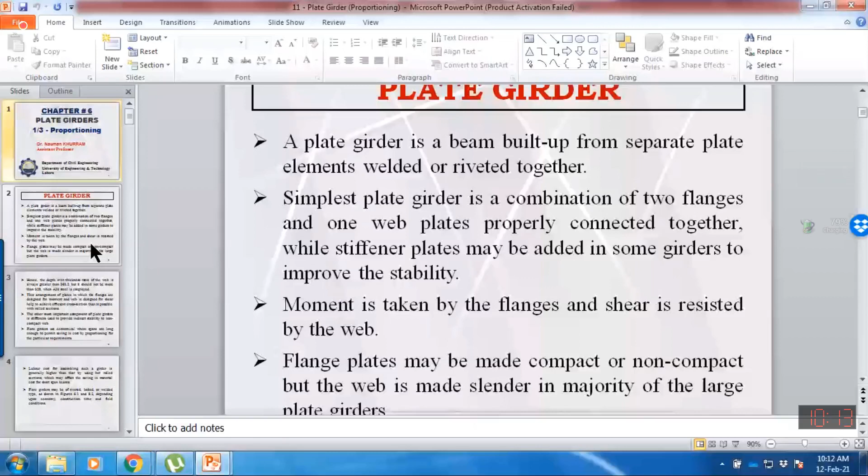So what we need to do is check the capacity of the web only, without any stiffener. If the shear capacity of the web is more than the applied force - for example, in example 6.1, when we designed the plate girder, we plotted the shear force and bending moment diagram. This was the bending moment diagram, and the maximum shear force acting in the plate girder for this loading is 1519. So we check the web: if shear capacity is more than 1519 in this case, then we do not need any stiffener.

But if the capacity of the plate girder web is less than the applied shear, it means we need to strengthen the web. How can we strengthen the web or improve shear capacity? We need to provide stiffeners, or subdivide the web panel into different segments. So in stiffener design, we are going to decide the spacing of the stiffener, number one, and the thickness of the stiffener, because the length of the stiffener is already known - it is provided between the flanges, so whatever is the height of the web, that is the length of the stiffener.

So when we are designing the stiffener, what does it mean? We decide the spacing of the stiffener and the thickness of the stiffener in such a way that the shear capacity of the web panel may be more than the applied shear force. So here, first I will give you an overview of stiffeners, what types are there, and what the design criteria are.

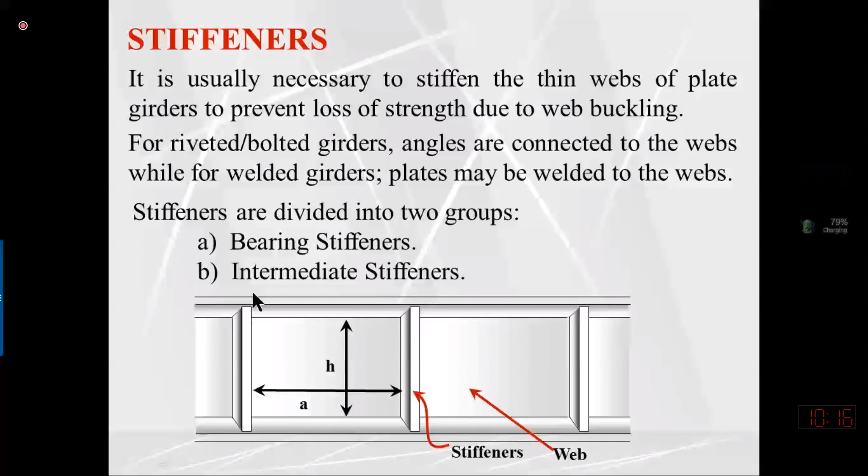What are bearing stiffeners? From the word bearing, it means they are bearing or resisting the load. Bearing stiffeners are normally provided wherever a concentrated or very heavy force is acting on the plate girder. What are the types of concentrated force? Support reaction and any heavy or concentrated load acting on the plate girder. So we always provide bearing stiffener at supports and wherever a point load is acting, because when a concentrated or very heavy point load acts, maybe on any side of the flange, due to stress concentration it may cause web crushing or web crippling.

So to safely transfer the force from the top or bottom flange to the web, we need to increase the area of the web by providing the bearing stiffener. These transfer heavy reaction or concentrated load to the full depth of the web, providing uniform shear transfer, changing the stress from local to uniform distribution, so there will be no crushing or web buckling. Bearing stiffeners are always provided in pairs, meaning they are provided on both sides of the web.

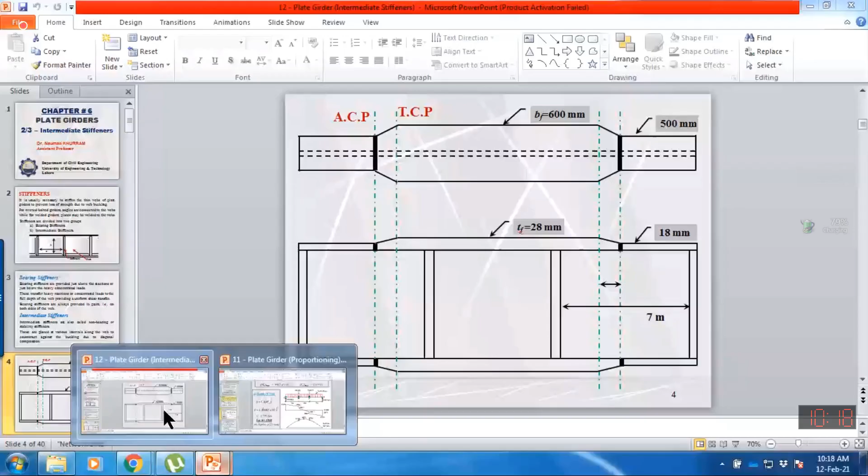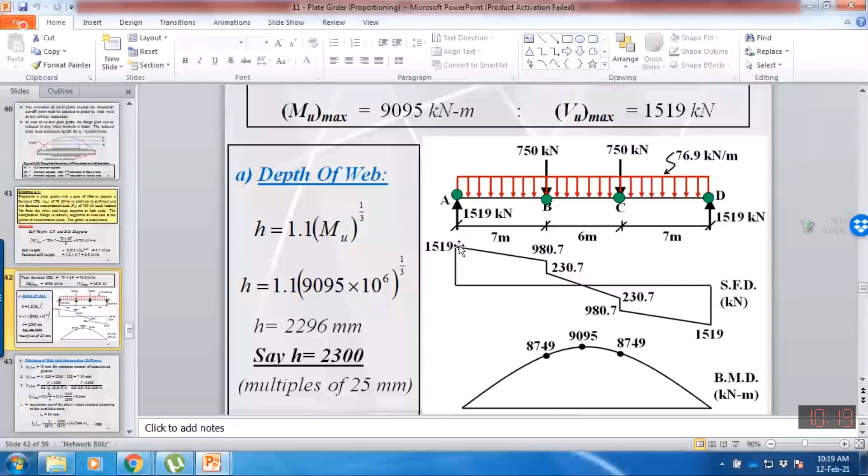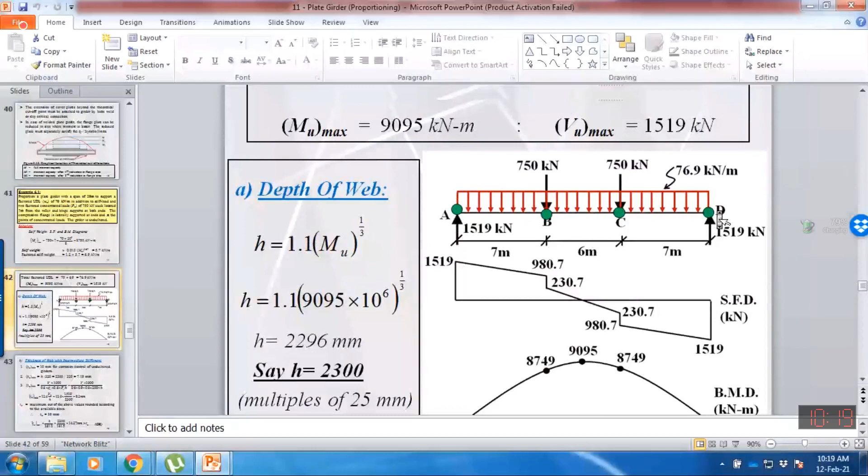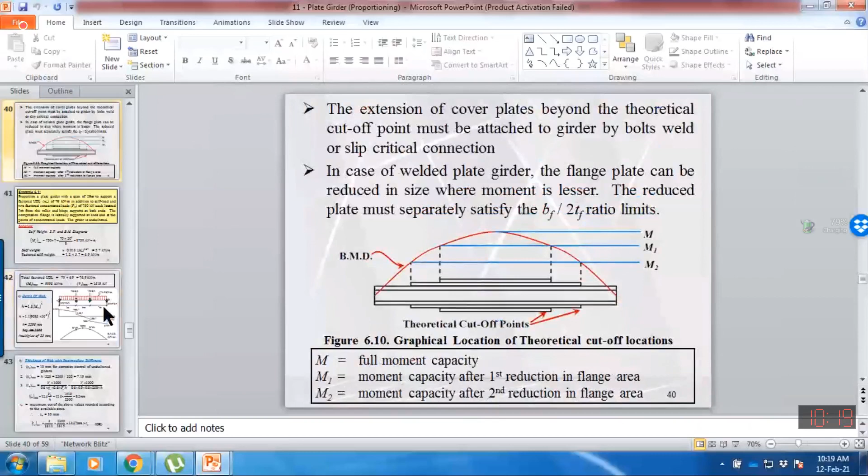So it means that from the top, at points B and C, there are chances that the web may cripple or local crushing may occur due to a heavy force. Similarly, due to a heavy support reaction acting at the bottom flange, the web may crush, cripple, or buckle. So we need to provide bearing stiffener at points A, B, C, and D because these points are subjected to concentrated force. This means the location of the bearing stiffener is already known, wherever the support reactions or heavy loads are being transferred to the web.

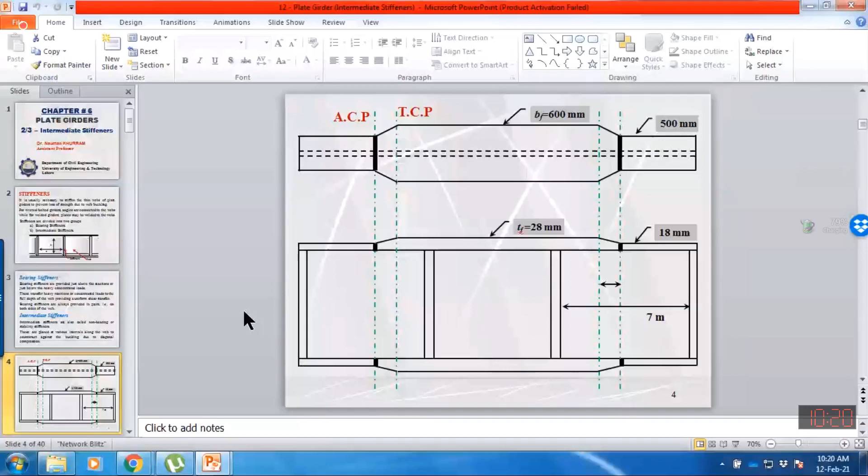Last time when we designed this plate girder, we already knew the location of the bearing stiffener. Bearing stiffeners are provided at the ends and underneath concentrated loads. Then, in between panels, if the shear capacity of the panel between bearing stiffeners is less than the applied shear, we also need to provide intermediate stiffener to enhance the shear capacity of the web. So bearing stiffener serves both as an intermediate stiffener and as a bearing stiffener, increasing the shear strength of the web and also resisting the applied or concentrated force by providing column action, because the bearing stiffener between the flanges may behave as a column. We shall discuss this in detail in our next topic.

And what are intermediate stiffeners?

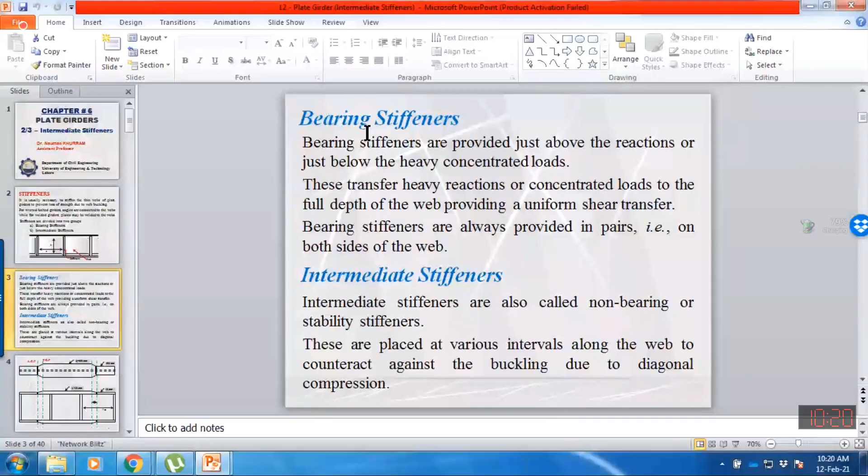Intermediate stiffener are also called non-bearing or stability stiffener. These stiffener are not resisting any applied load. Rather, they are stabilizing the web, or they are improving the shear capacity of the web. These are placed at various intervals along the web to counteract buckling due to diagonal compression. I will explain this phenomena. But at the moment, you must understand intermediate stiffener are provided to enhance the shear capacity of web or to stabilize the web.

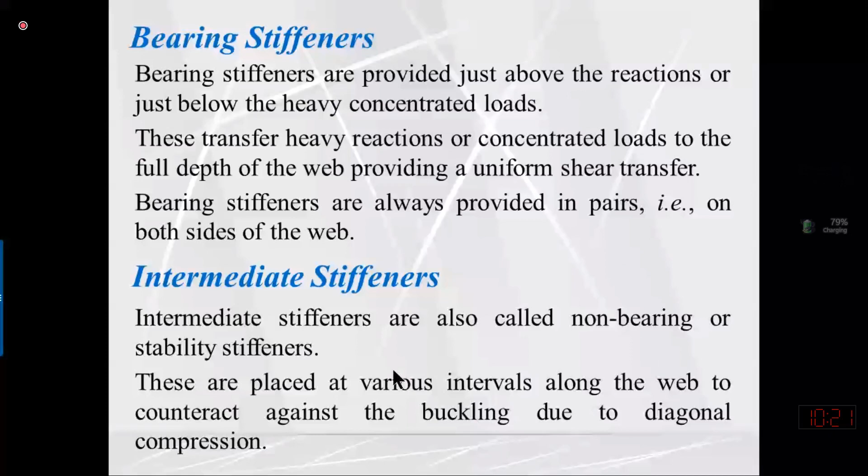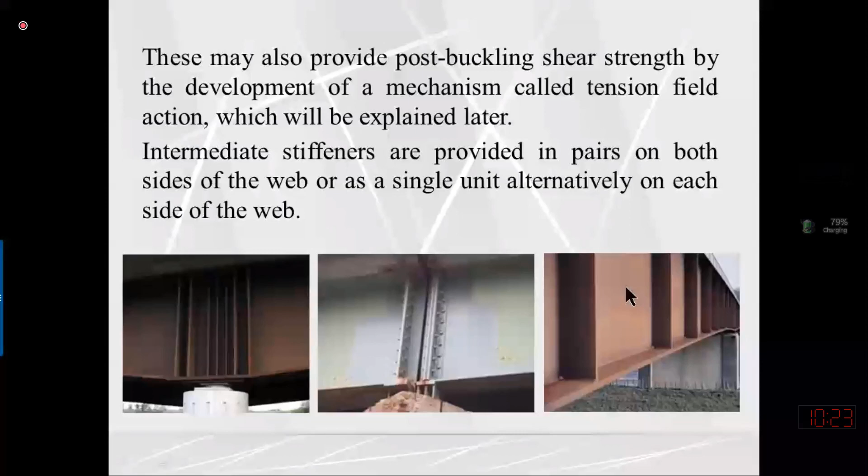Actually, we know that when the web is slender, meaning the slenderness ratio of the web is more than the lambda r value of web, it means that our web will never fail due to yielding of the web. So the web will never fail due to shear yielding. Rather, the web will buckle at a value much less than tau y or much less than fy.

So what we are doing is using a parameter called CV value, which is the web buckling coefficient. This web buckling coefficient is the parameter which converts the yield stress to the critical stress or buckling stress. So CV value is the ratio between critical buckling strength over yielding strength. Tau critical for a slender web will always be much less than tau y. So what is that value? If we multiply tau critical... tau y with CV, we may have tau critical. Similarly, that will also be equal to critical buckling strength, shear force, or the capacity, shear buckling strength over yielding shear strength, because tau critical multiplied by area of the web is equal to VCR.

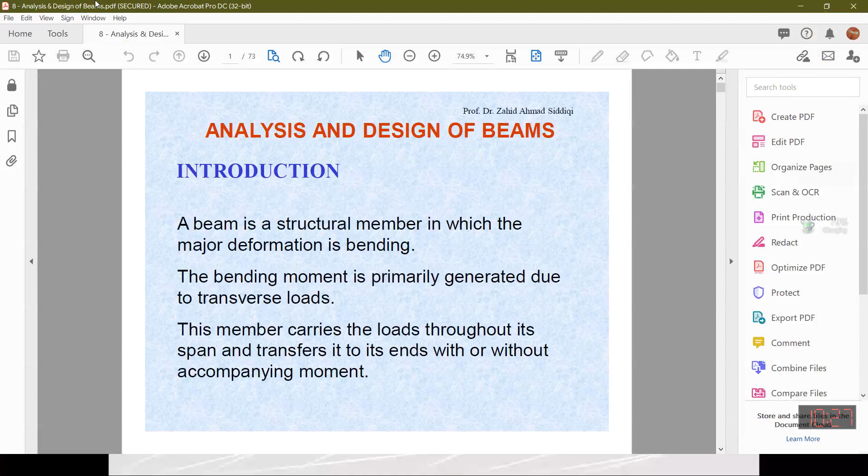But if we are providing the stiffeners, then we have some extra strength available, which can be determined by CV prime. So CV prime is the shear enhancement factor. In other words, this is not the exact definition, but CV prime is the strength or shear strength improvement in shear strength due to stiffeners. The increase in shear strength by the provision of stiffener is computed by CV prime value.

So the total strength will be equal to, because this parameter is constant, tau y is equal to 60% of Fy, because shear strength of steel is indirectly determined by multiplying tensile strength with 0.6, and area of the web is height of the web into thickness of the web.

So this CV is the factor which is used to determine the buckling strength of web alone without stiffeners. And CV prime is the factor which lets us know the improvement of shear strength by providing intermediate stiffeners, or increase in shear strength of web due to provision of intermediate stiffeners, and how we are having extra strength available due to the stiffeners we shall discuss in today's lecture.

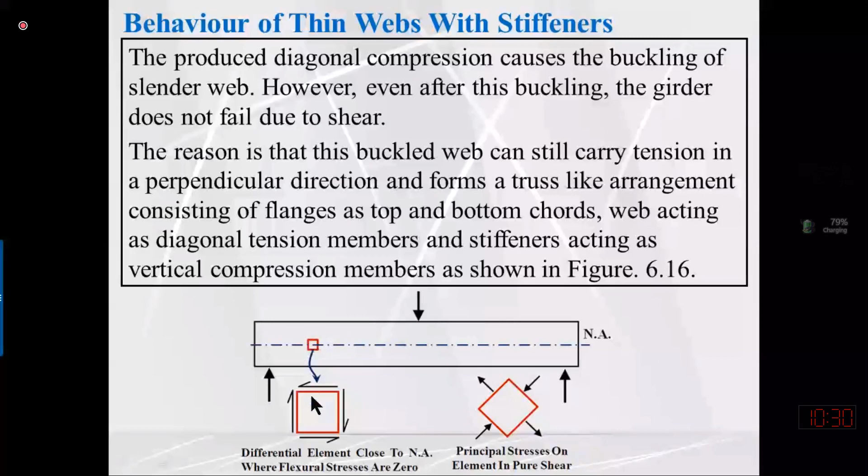So I would like to explain step by step. I'm taking this small element from the web, and this element's bottom is along the neutral axis. Just to explain this, let me separate out these forces first, so that you will be able to understand. What I have done, I have taken a very small element along the neutral axis, and you can say that the height of this element may be dy and the thickness may be equal to dx, differential, very small.

And at the bottom of this element, okay, from this side, this is also continuous, this side is also continuous, this side is also continuous, because we have cut this material. So at the bottom, we can determine the horizontal shear stresses which are acting, by this formula.

Tau x is equal to VQ over Ib, or VA prime into y bar, that's supposed to be the partial area above the layer and moment arm of that partial area above the neutral axis. So anyhow, we are able to determine it.

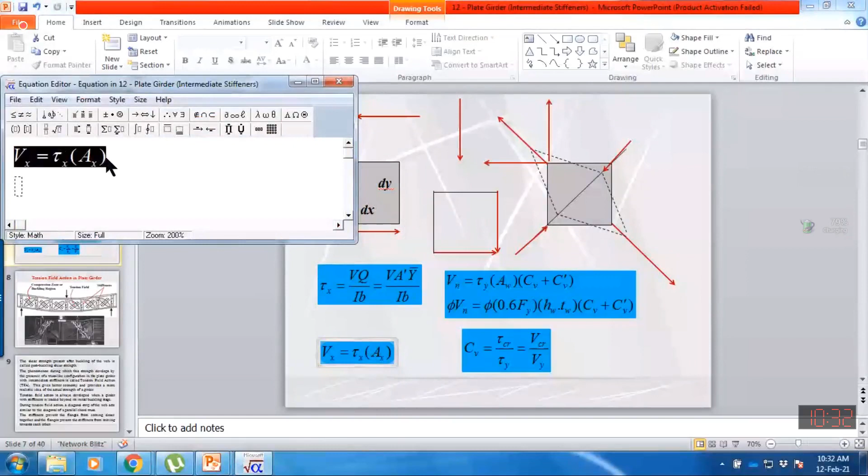So you can convert this shear stress into shear force if you multiply this shear stress by the area; this area will be equal to dx, and you can consider that the out-of-plane dimension is 1. So you can say that this is equal to dx into 1.

So you have this force as a Vx force. So what do you think? Because on this element, we must have some reaction over here, some reaction here, and also a reaction here to balance this free body diagram for the element, because these are continuous material, because we have cut it. So what do you think, is this element balanced? No.

Just to balance this force, which is acting in this direction, if we apply summation Fx equal to 0, we must have a balancing force acting on the top side. And what do you think, is this element still balanced? Yes, summation Fx is equal to 0, but rotational equilibrium is not balanced. For example, if I take the moment about this corner equal to 0, this force is passing through this corner, so its moment will be 0.

This force tends to produce a moment on the counterclockwise side, meaning rotational equilibrium is not balanced. These two forces are perfectly equal in magnitude and act in opposite directions, so they are called a couple.

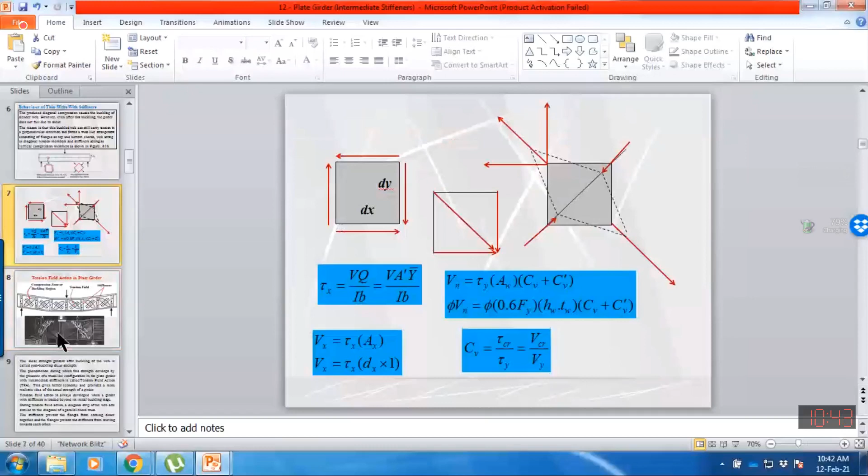The horizontal component is balanced by the normal forces in the flange plane, and the vertical component acting upward is balanced or resisted by providing intermediate stiffeners, which will have compressive force. So the intermediate stiffeners resist the vertical component of this diagonal force developing in the web, and the flanges balance the horizontal component of the tensile force developing in the web. In this case, we have extra shear strength available.

So the phenomena in which this tensile force develops in the plate girder is referred to as tension field action. The mechanism by which the tensile force developed in the web after buckling is balanced by the intermediate stiffeners and the flange is referred to as tension field action.

At the moment I have explained the behavior. Now we will read the definition of tension field action. This is very important, and sometimes I ask this question in quiz. This tension field action, or improvement of shear capacity due to development of these tensile forces, will only develop if we are providing intermediate stiffeners.

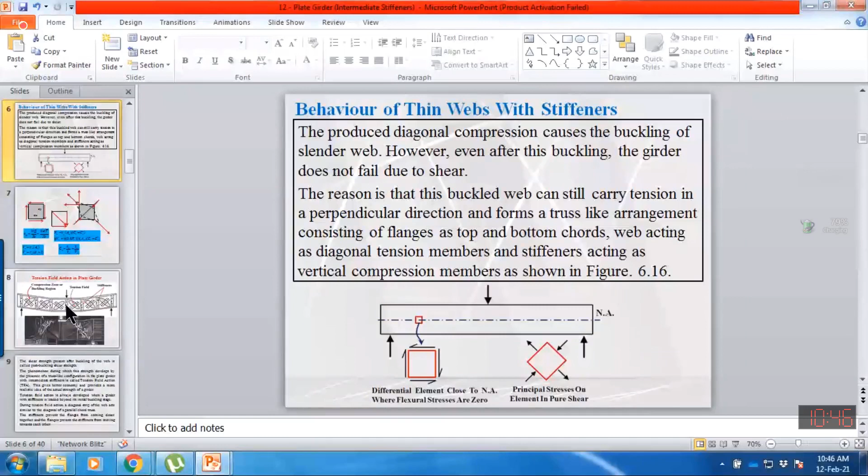Sometimes we also ask the question, what is the truss analogy in plate girder? If we are providing the intermediate stiffener in our plate girder, then after buckling, when the web approaches its buckling strength, tensile forces develop in the diagonal direction. To balance these tensile forces, the top flange and bottom flange behave as top chord and bottom chord of truss, and the intermediate stiffener serves as vertical member of truss, and the diagonal strip of the plate girder behaves as a diagonal truss member. Thus the shear capacity is increased by tension field action, or truss analogy.

So what is the truss analogy or tension field action? After the web buckling, the top and bottom flange behave as top and bottom chord of the truss member, the stiffener behaves as a vertical member, and the diagonal strip serves as a diagonal member.

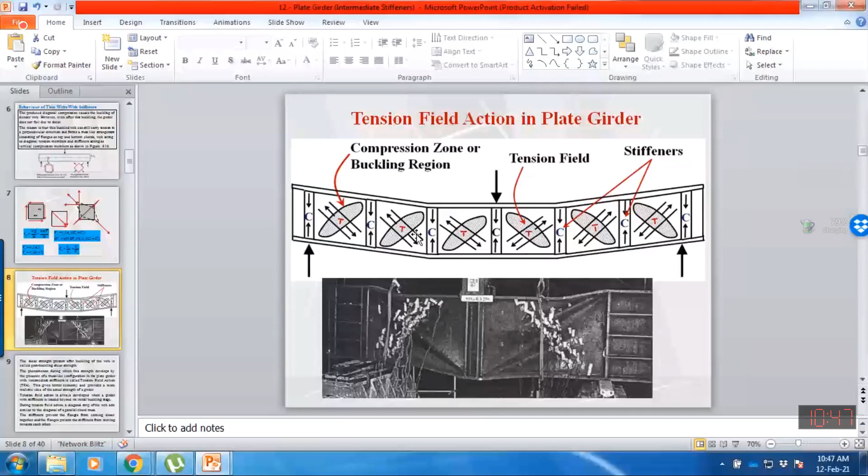So shear strength present after buckling, let me bold this, shear strength present after buckling is also referred to as post-buckling strength. This strength will only be available after buckling. When the web will not buckle, tension field action will not develop.

After buckling of the web, this is called post-buckling strength. The phenomena during which this strength is developed by the presence of a truss-like configuration in plate girder with intermediate stiffener is called tension field action.

So I have already explained this gives better economy and provides a more realistic idea of the actual strength of the girder. It means that if we have extra strength available, instead of increasing the thickness of the web, we can consider that fraction of the strength which is contributed by tension field action.

Tension field action is always developed when a girder with stiffener is loaded beyond the initial buckling stage. This is very important to learn.

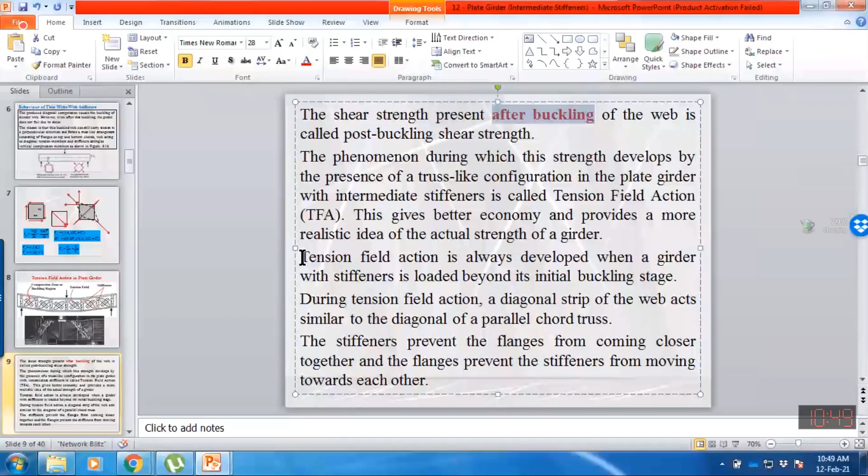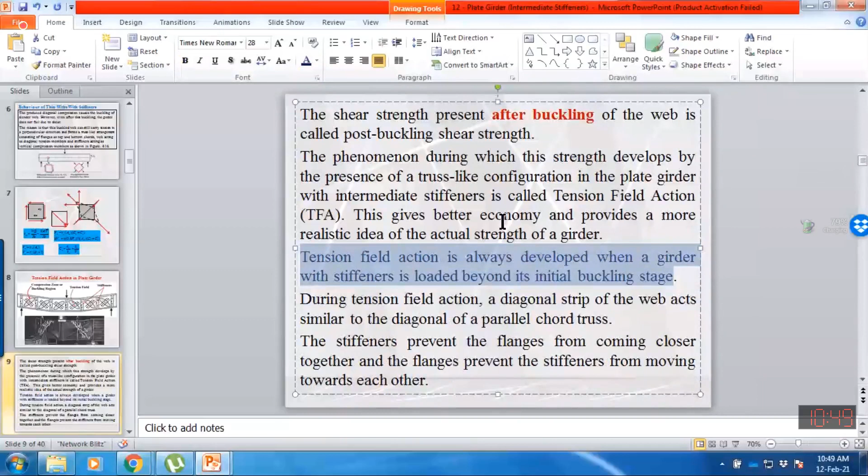So tension field action will only develop in two cases. Number one, if we are providing intermediate stiffener, and number two, if the web is loaded beyond its buckling value. If the web is not subjected to its buckling value, tension field action will not develop, because it only develops when the web buckles. And when the web buckles, perpendicular to the buckling direction, tensile forces will develop.

Thus, during tension field action, a diagonal strip of web behaves or acts like a diagonal member of the parallel chord truss. The stiffener prevents flanges from coming closer to each other, and the flange prevents the stiffener from moving toward each other. So what does it mean?

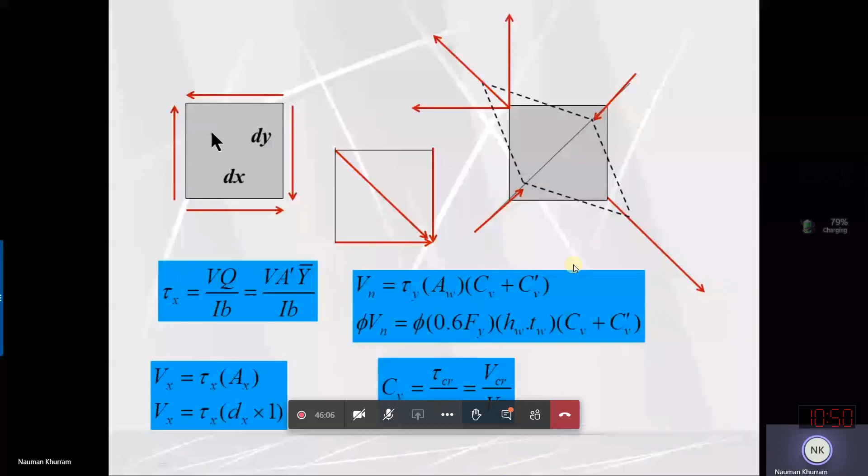The flanges will not let the web thickness, web height, and stiffness reduce. They will also resist the shortening, the reduction of dimension, or the change of shape of this web panel. So if we are not providing intermediate stiffener, then the buckling or deformed shape of the web will be likely to occur.

Intermediate stiffeners, which before initial buckling were assumed to resist no load, will resist compression load after web buckling and will serve as a compression vertical of truss. So what does it mean? It is very important to understand.

Intermediate stiffeners will only become active once the web buckles. So before the web buckling, no compressive forces develop in intermediate stiffener. They become active only once the web buckles, and when the web buckles, tensile forces develop in the web panel, which must be resisted by the intermediate stiffener and flanges.

With tension field action, a web may resist shear equal to 2 or 3 times that present at initial buckling. So what does it mean? It means tension field action contributes shear capacity almost 2 to 3 times more than web buckling strength alone.

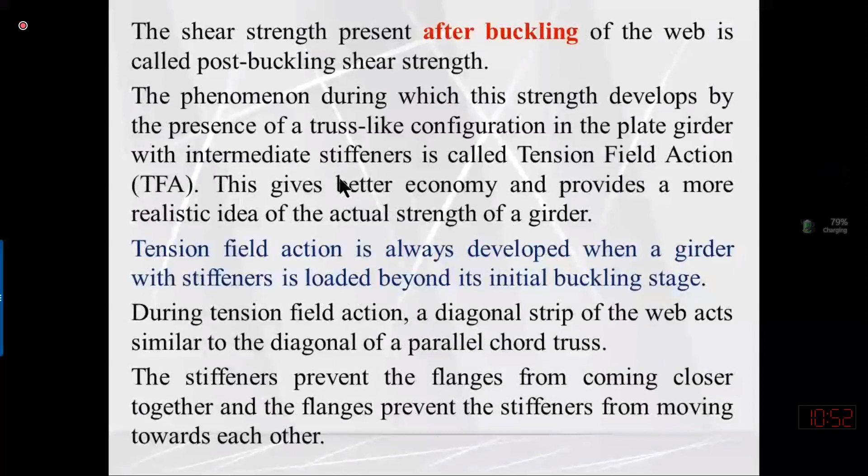So what does it mean? If let's suppose this is constant, this CV value is the fraction of the strength available due to web buckling alone.

CV prime is the strength enhancement due to the presence of intermediate stiffeners. CV is the coefficient that tells us the shear strength of the web alone, the buckling strength of web alone. CV prime is the factor that tells us the contribution of tension field action. So when we are solving the example, you will see that the CV prime value will be almost 2 to 3 times more than the CV value.

If CV value is 0.2, then CV prime value will be maybe 0.6. Or let's suppose if CV value is 2, then CV prime value will be maybe 6. So we can have an idea, and when we are solving the numericals, I will repeat it again.

So the estimated ultimate shear that a panel of the web between adjacent stiffeners can withstand is equal to the shear strength, or buckling strength, of the web alone plus the shear strength contributed by tension field action. The amount of tension field action depends upon the proportioning of the panel.

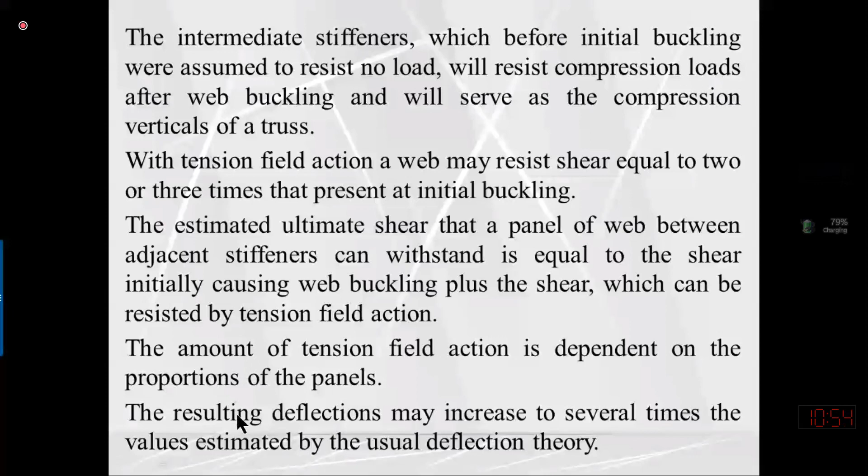So when we are achieving or improving the shear capacity by tension field action, this is because tension field action will only be available once the web buckles, meaning it undergoes large lateral deflection.

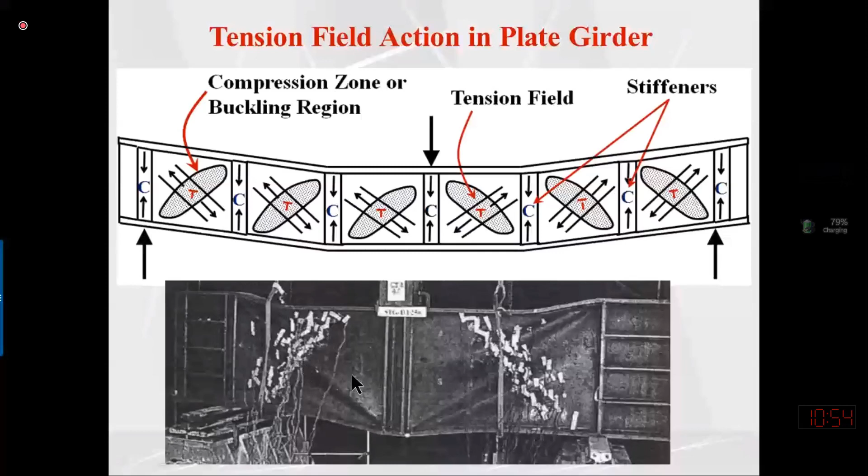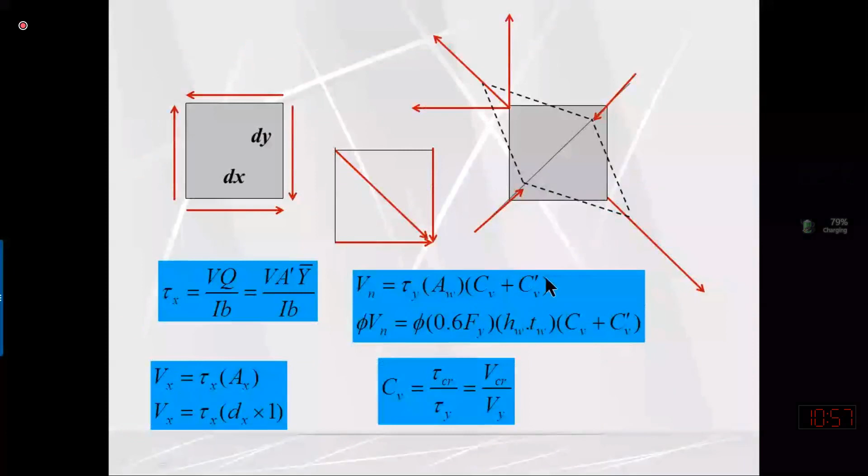So we will study their proper definition. CV is called the shear coefficient without tension field action and stiffeners - it is the shear coefficient or shear strength parameter, the shear strength provided by the web alone, called shear coefficient without tension field action and stiffeners.

So it is the ratio of critical web stress to shear yield stress of web material. CV is the ratio between critical web buckling shear strength over yielding shear strength. In other words, the CV value is used to convert the yield strength to the buckling strength. So the CV value will always be less than 1.

So this is the parameter that lets us know at what percentage of the shear yielding the web is buckling - the fraction of shear strength available due to the web alone, or buckling strength of web alone. This parameter is used to determine the buckling strength of the web alone with respect to the shear yield strength of the web - as compared to the shear yield strength of the web, how much percentage or fraction of web buckling strength is available.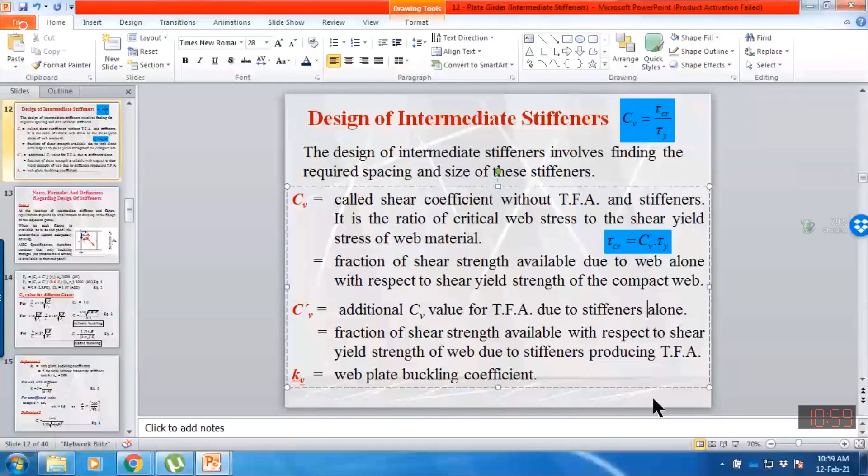Fraction of shear strength available with respect to shear yield strength of web due to stiffener producing tension field action. How much extra strength as compared to the yield strength is available due to tension field action.

Kv is the web buckling coefficient. Next question is how we can determine Cv and Cv prime value.

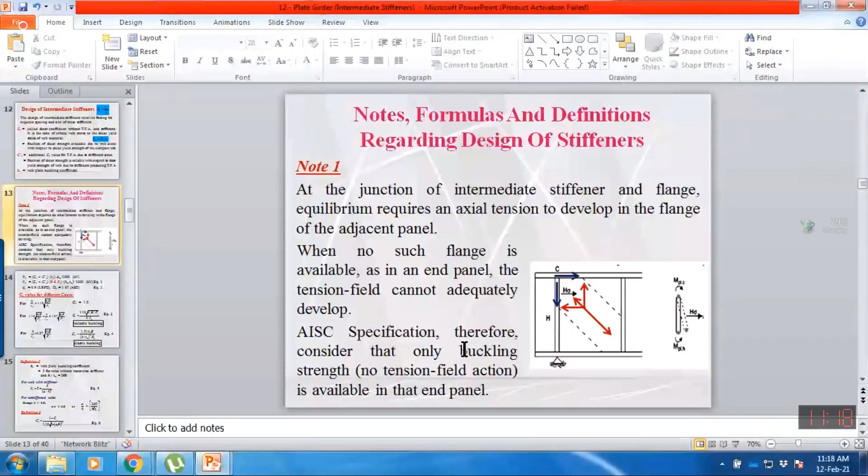As we discussed previously, when the web will buckle and we are providing intermediate stiffener, a bearing stiffener will also serve as intermediate stiffener. When a web panel is buckling due to compressive forces developing in this direction, after buckling, the tensile force will develop along this diagonal direction.

We can consider a web strip of uniform thickness which is subjected to tensile forces. These tensile forces can be balanced: the horizontal component of the tensile force developing in this strip is balanced by the resistance offered by the flange, and the vertical component of this tensile force is balanced by the compressive forces developed in the intermediate stiffener.

After that, when the stresses in this stiffener or in this flange due to these resisting forces become more than the yielding of material, failure will occur. If these stresses are less than yield stress, it means they will be capable of resisting or balancing these tensile forces, so they are enhancing or improving shear strength, as we have already discussed.

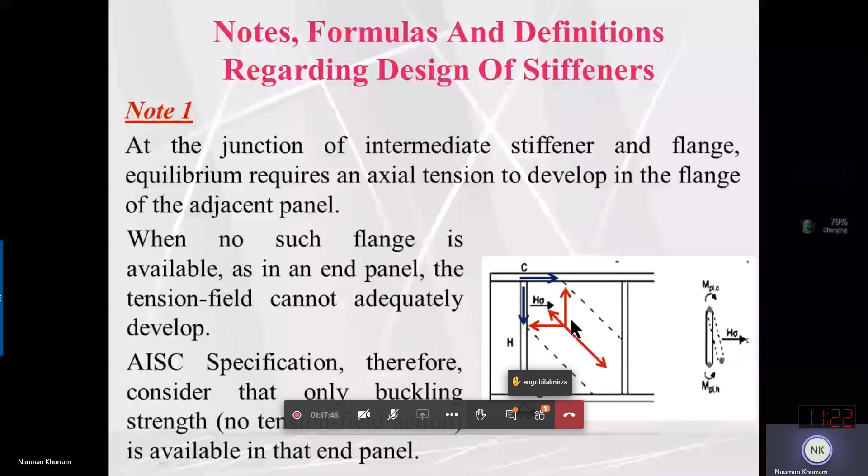How do we compute the total shear capacity? Total shear capacity is computed as a fraction of the strength contributed by web buckling alone plus a fraction of the strength contributed by tension field action, which can be determined by computing Cv and Cv prime values respectively. So if we are given the design of plate girder, meaning we know the flange size, web size, spacing of stiffener, and size of stiffener, we can determine the total shear resistance or shear capacity of web with and without tension field action.

So how can we compute the Cv value? Cv value is based upon three conditions, just like I told you that our plate girder may be compact depending upon flange compactness, depending upon lateral torsional buckling, and similarly based upon web local buckling.

So you can see we are having three different formulas, just to give you the analogy, we are having three different expressions to compute CV value. For example, if our web is compact, the height of the web over thickness of the web ratio is less than this parameter, 1.1 under root kV into E over Fy. So you can consider this is the lambda p value for the web of plate girder.

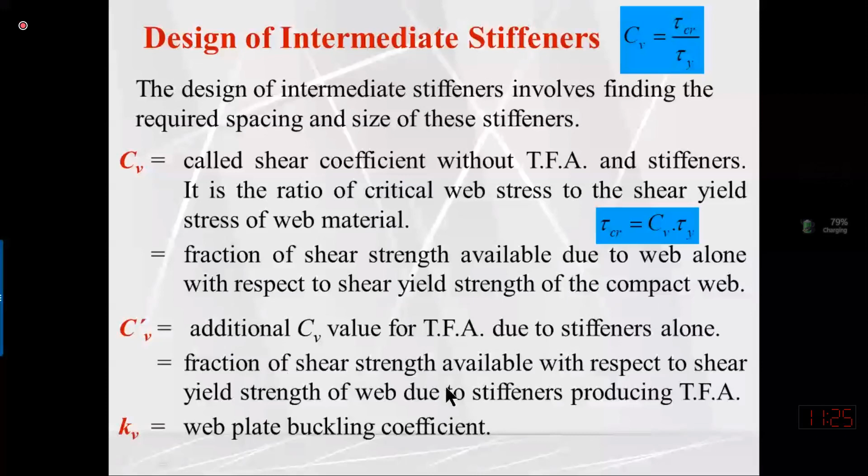So KV value is the web plate buckling coefficient, which is depending upon the panel size or the aspect ratio of web. So this KV value will be equal to 5 when we are not providing intermediate stiffeners. If we are not providing transverse or intermediate stiffeners, then KV value will be equal to 5. Or if height of the web over thickness of the web ratio is also less than 260, in both cases KV value is equal to 5.

But when we are providing the stiffeners, then we need to compute KV value by this expression: 5 plus 5 divided by A over H ratio squared. This means that KV value is the function of spacing of stiffener and height of the web.

Lesser will be the spacing, more will be the KV value. Because if A will be larger, we will have this larger component, so 5 divided by a larger value will have the lesser answer. So KV value is the function of spacing of stiffener. A is the spacing of stiffener.

In other words, we can say that KV value, if it is a function of spacing of stiffener, then H over TW ratio needs to be compared with this parameter, which is also the function of KV value. So depending upon this condition and elastic buckling of the slender web, we are having two different CV formulas, because CV value is also directly proportional to the KV value. So what we can say is that CV value, to a certain extent, is also the function of spacing of stiffener.

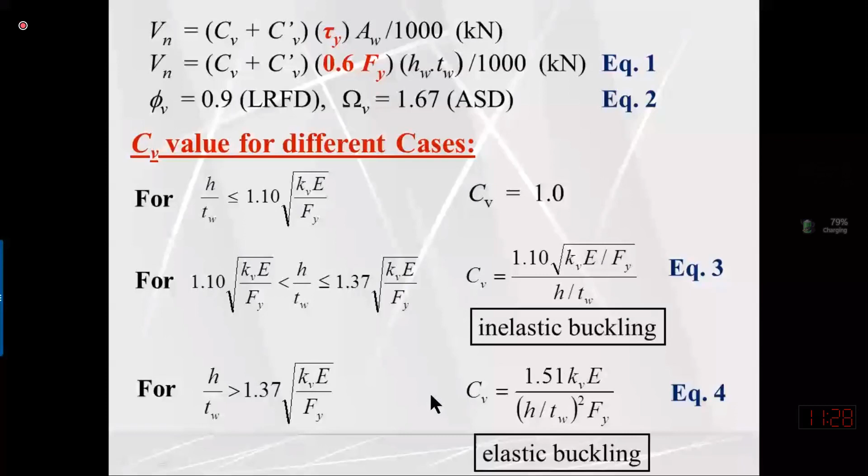Because KV value is 5 if we are not providing intermediate stiffeners, the minimum value of KV will be 5. KV value will be larger if we are providing intermediate stiffeners. So for unstiffened web, K value will be equal to 5, let me make it KV.

Sometimes we are providing the stiffener, but the spacing of the stiffener is very large. So if the spacing of stiffener is very large, tension field action will not develop. Tension field action will not develop if A over H ratio is more than 3. More than 3 means the spacing of stiffener is more than 3 times the height of the plate girder.

Or if A over H ratio is more than the square of 260 over H over TW ratio, we will satisfy this condition when designing the plate girder. And the formula for CV prime is this one, equation 6, and it is the function of CV value and A over H ratio. Again, CV prime is the fraction of the strength available due to tension field action.

So this formula CV prime is only applicable if A over H ratio is less than 3. First, if we are providing stiffener and spacing of stiffener is less than 3 times the height of the plate girder, and also A over H ratio is less than 260 over height of the web over thickness of the web ratio squared.

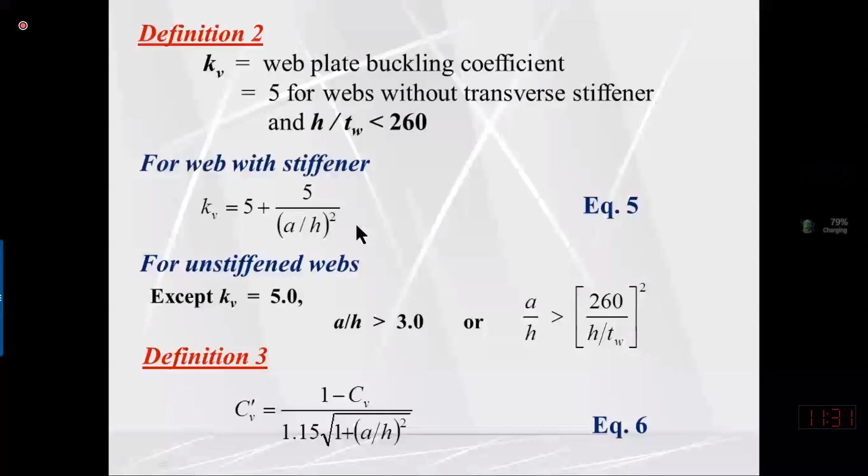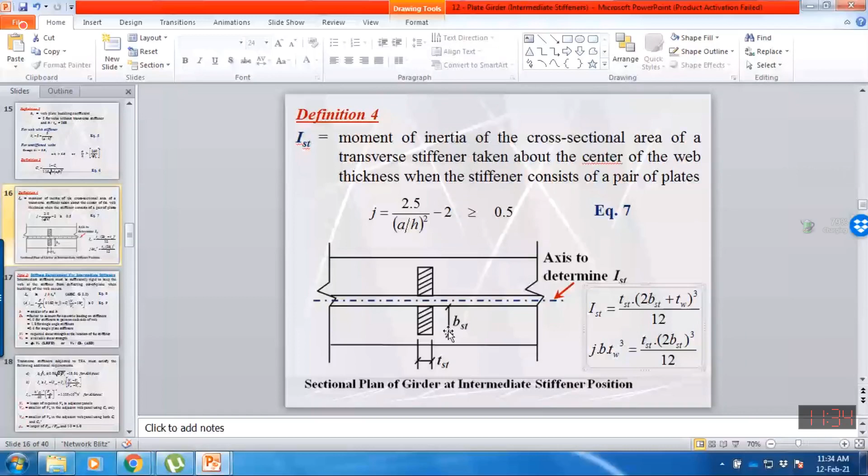So we can compute the moment of inertia about this center of web. Actually, this expression is equal to... if I'm taking the moment of inertia of these two stiffeners, if B is the width of one stiffener, and TST is the thickness of one stiffener, the total width of two stiffeners will be equal to BST plus thickness of web plus this BST.

So total depth of two stiffeners along with the thickness of the web will be equal to 2 times the BST plus thickness of web, and this thickness will be equal to TST. So moment of inertia will be equal to B into D cube divided by 12. The B value is the thickness and the depth is equal to 2 times the B value, one B value is 1B and thickness of web.

But for simplification, we ignore this thickness of web. For simple calculation, we ignore the thickness of the web, so we are having this simple formula. So this is the moment of inertia of intermediate stiffener

about center of web. So if you are using two stiffeners, using stiffener in pair, then you will have this expression. But if you are providing a single stiffener only on one side, then you need to deduct this two, because total thickness of the stiffener about this center will be B. And if you are computing the moment of inertia of one stiffener about its base, this formula will be 3, because you are supposed to compute the moment of inertia of a single stiffener about its base. The moment of inertia of a rectangle about centroid is B d cube divided by 12, and moment of inertia of stiffener about its base will be B d cube divided by 3.

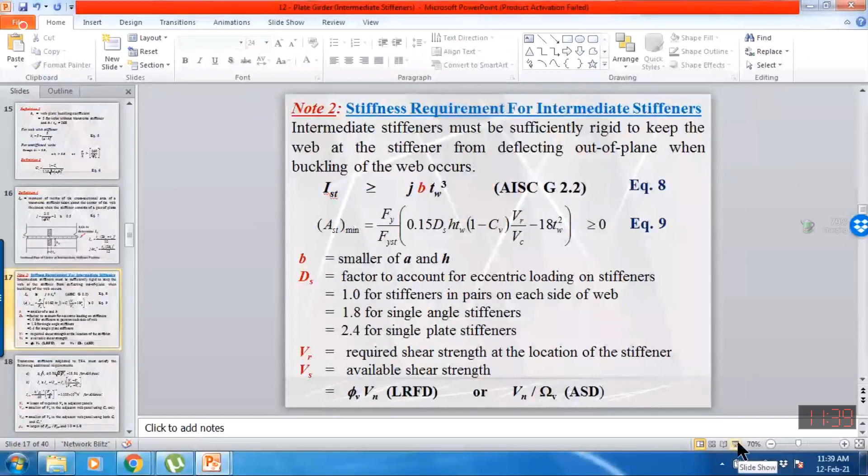But anyhow, this equation is no longer being used. So the next thing is that from here, in this expression, we know the J B TW cube. This is one numerical value because the thickness of the web is known. B is the lesser out of A and H. J we are determining from here.

So actually, in this equation we have two unknowns, one TST, one BST. So we are solving this equation and this equation simultaneously. AISC says that the width B over thickness ratio of the stiffener should be less than or equal to 0.56 under root E over Fy, which is

15.844836. Please correct this value in your book. In your book, this value is written as 28 point something, which is misprinted. The actual value is 15.84. Please also correct this in your book.

So if I'm fixing BST over TST value at 15.84, BST will be equal to 15.84 times the thickness of stiffener. So by solving this equation and this equation simultaneously, we can compute the B and T values of the stiffener.

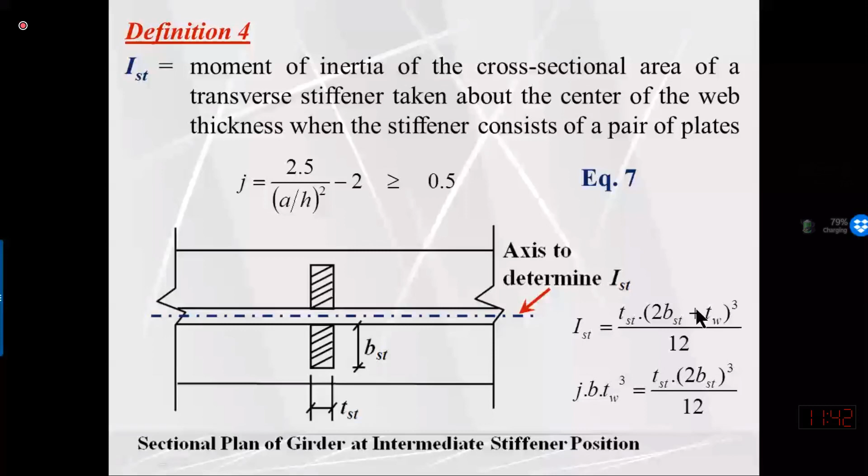So for IST1, we are computing the moment of inertia of the stiffener when we actually know the thickness and width of the stiffener, ignoring the thickness of the web. If this side is more, we don't need to revise the size of stiffener. But if this portion is lesser than the IST value, we need to determine further.

And what is IST2? IST2 is determined by this formula, which is h power 4 into rho st power 1.3. What is rho st? That is the ratio between the yield strength of the web to the yield strength of the stiffener. If we are using the same steel in the stiffener and also in the web, then rho value will be equal to 1, and this complete parameter will be equal to 1.

FYW is the yield strength of the web over E value. For A36 steel, Fy is 250 megapascal, E value is 200,000 megapascal, and rho st is equal to 1. If we simplify this equation, that will be equal to 1.105 times 10 to the power minus 6 into h4.

And what is this value? IST2 is the minimum moment of inertia of transverse stiffener for development of full resistance against both web shear buckling and web tension field action. So this is the minimum moment of inertia required to resist the web buckling and also tension field action.

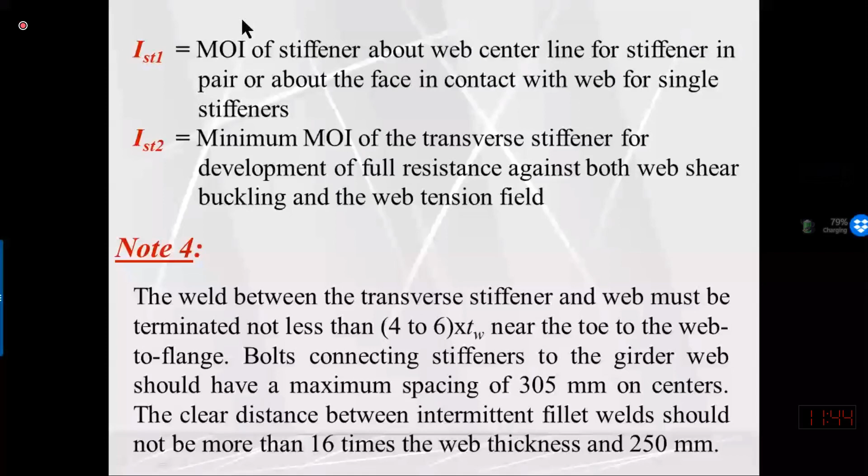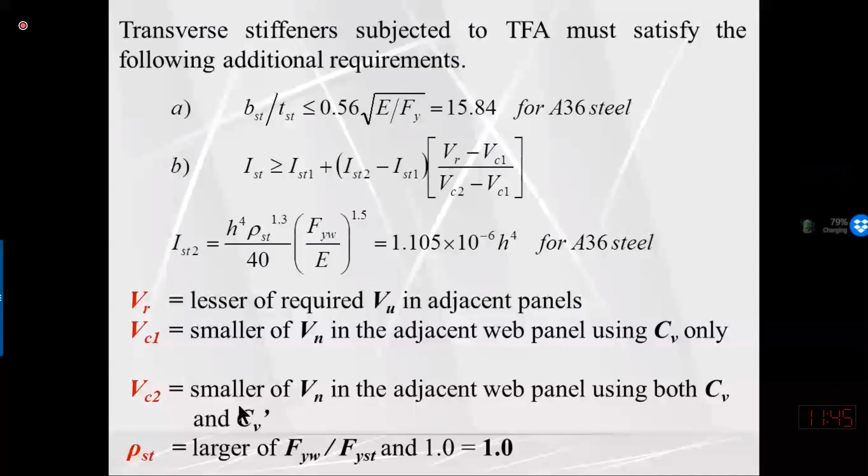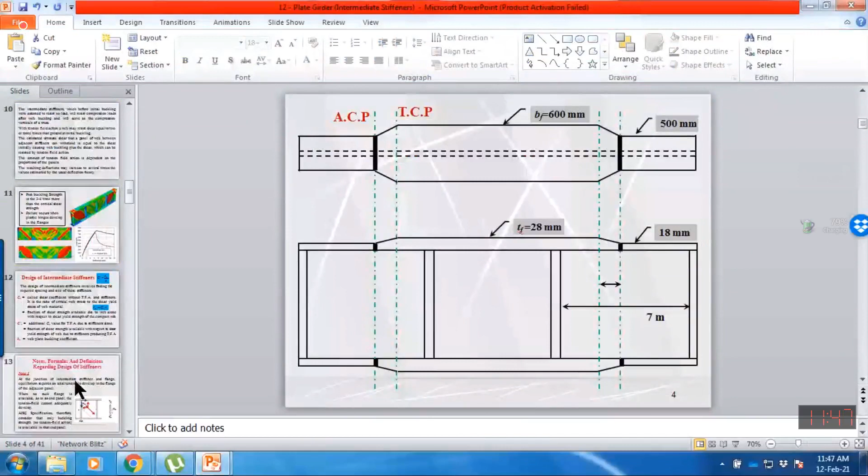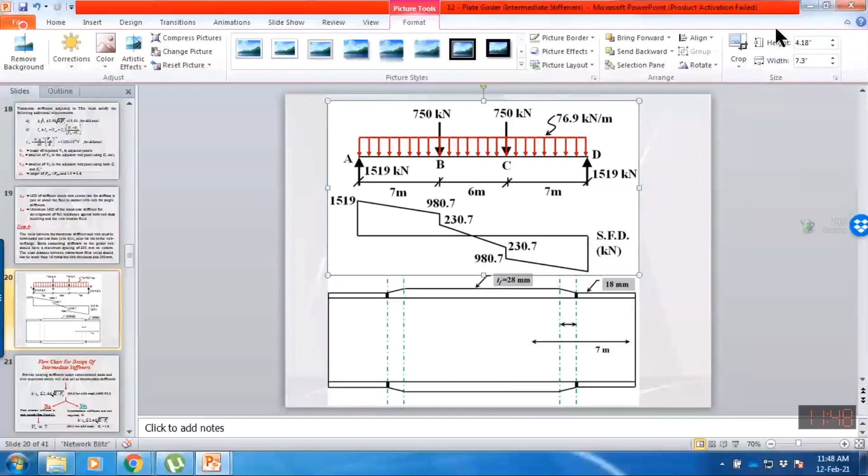Okay, let me explain from some diagram. Let me copy this, and similarly I need to copy the web panel also, just to make this diagram more simple. Let me also copy this diagram maybe here. I need to make this diagram more bigger, and this diagram small. Anyhow, this would be fine.

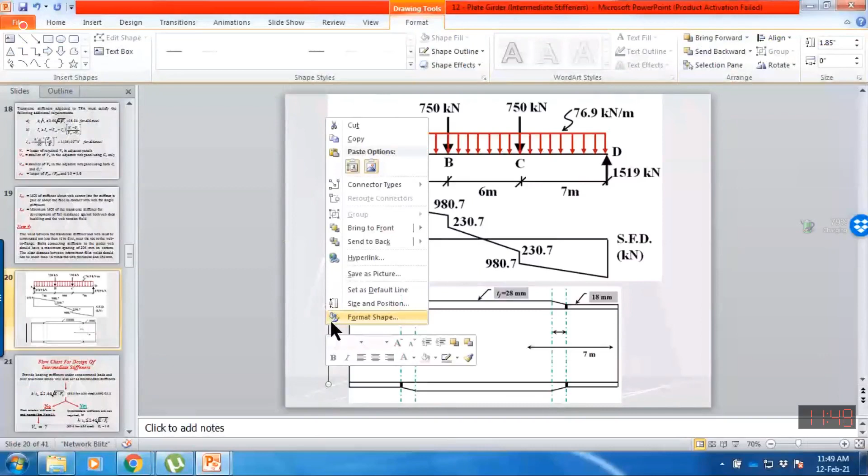So what I want to explain: let's suppose we want to decide the intermediate stiffener now. Let's suppose this bearing stiffener also serves as intermediate stiffener, and one stiffener I am providing over here, and one stiffener, let's suppose, and this is a bearing stiffener I am having, and one stiffener may be in the center, and one stiffener may be over here.

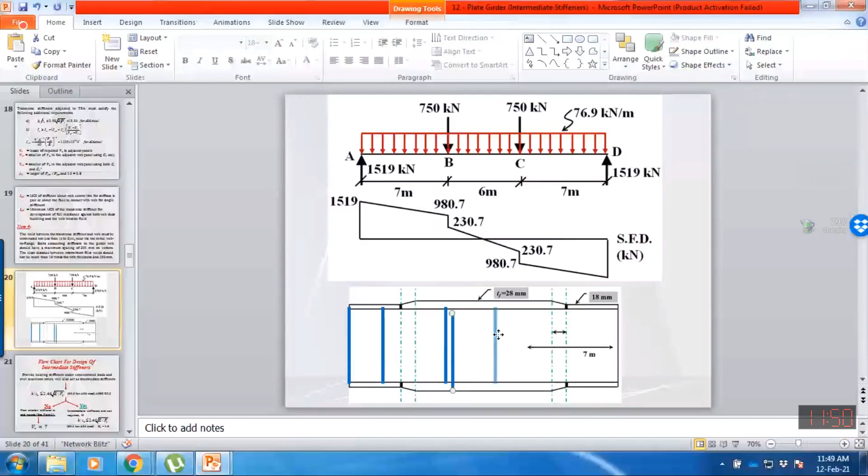What I want to explain: if I want to design this intermediate stiffener, this one, so this intermediate stiffener is having this web panel and also this web panel. So what will be the VR?

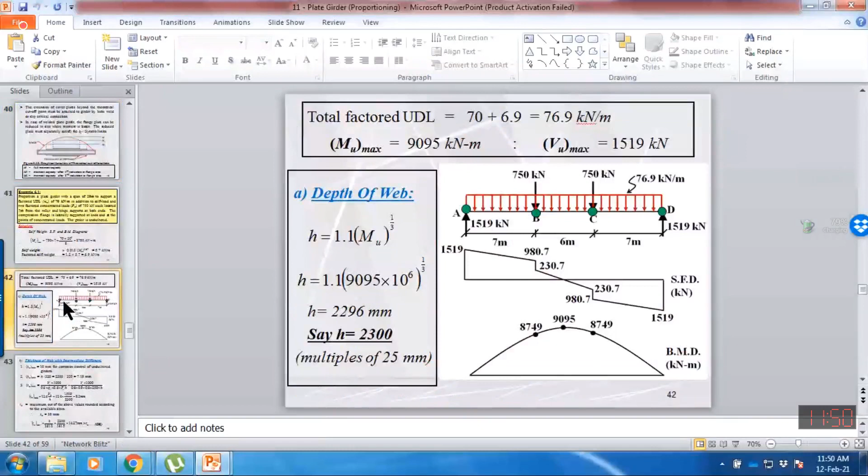VR is lesser of required VU in adjacent panel. Lesser mean, where I have gone? In this web panel, because if I'm moving, so at this edge we are having shear force 1519. So what will be the shear force at this point? What is the maximum shear force in this panel with reference to applied? So the maximum shear force within this panel will be this 1519.

And in this panel, the maximum shear force is this one and minimum is this one. So this panel is subjected to lesser shear force, which is at this junction. So VR value will be whatever is the minimum applied shear in adjacent panel, or in any one panel on both sides. That will be the shear force at this junction, because this web panel is subjected to maximum shear 1519, and this web panel is subjected to maximum shear just at this junction. So the lesser value will be in this second panel, so VR will be whatever is the shear force at this junction. So we shall determine when designing.

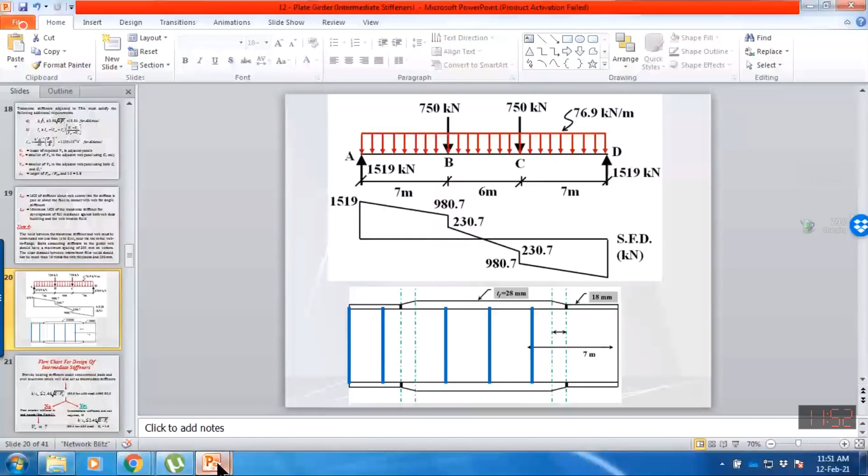And similarly, what is VC1? It is the smaller of VN in adjacent panel using CV only. So here we need to check whether this web panel... okay, I'm designing this stiffener, so we are having one panel on one side and one panel on the other side. So you need to check which panel on either side is having less buckling strength, web buckling, without tension field action. Whichever panel is having less web buckling strength without tension field action, that is VC1.

Similarly, you need to determine the shear capacity of this web panel and this web panel, both with tension field action also. So whichever web panel will have the shear strength including tension field action lesser, that will be VC2. So if this panel is having lesser shear capacity in tension field action, then VC value will be based upon this panel. I will elaborate more when we are discussing design examples.

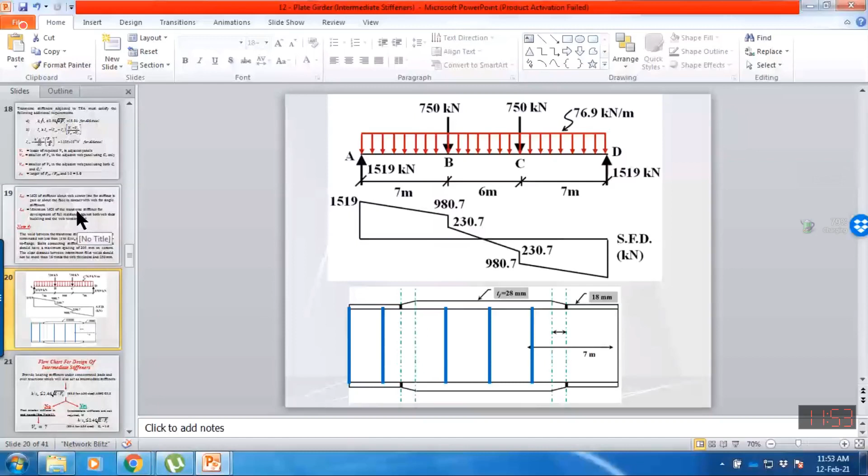So VC2 is the smaller of VN in adjacent panel. Adjacent means we are having two panels on both sides of the stiffener. So which panel is having less shear capacity including tension field action, and which web panel on either side is having the shear capacity excluding tension field action - that is the expression that we need to satisfy over here.

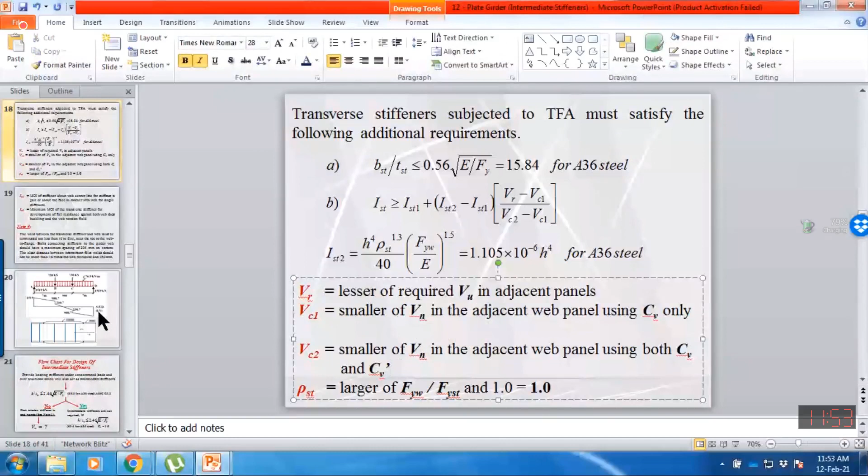The last thing we are going to discuss: the weld between transverse stiffener and web must be terminated not less than 4 to 6 times the thickness of the web near the toe of the web-to-flange connection.

So, bearing stiffener is provided throughout, from top flange to bottom flange. But for intermediate stiffener, they start from the bottom face of the top flange and are cut or discontinued at a certain distance from the bottom flange. So we provide a gap between the bottom flange and this stiffener, and this gap is between 4 times thickness of the web to 6 times the thickness of the web.

Why do we provide this gap? I will explain in my next lecture, because we want to avoid stress triaxiality. We want to avoid three-dimensional stresses at this bottom junction, which may cause cracking at the bottom flange. So how can we avoid this? I shall explain.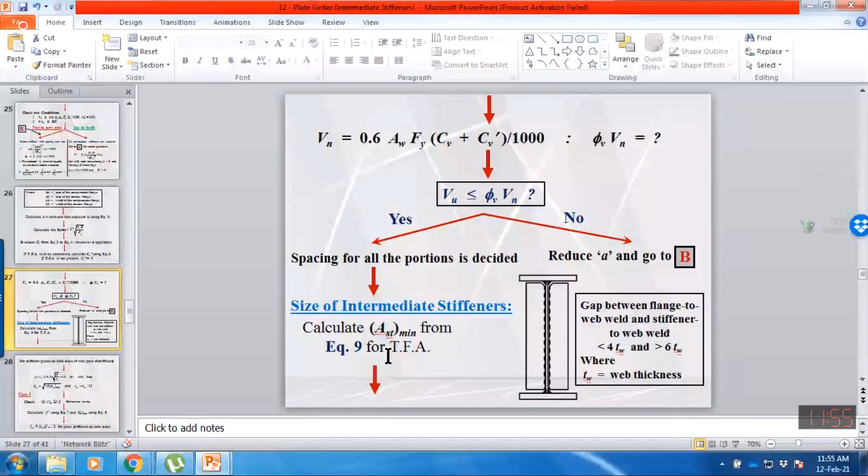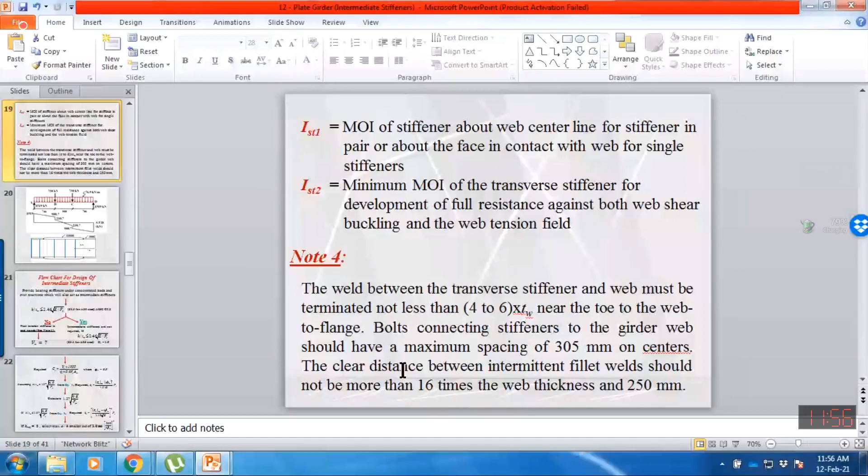If bolts connecting stiffener to the girder web, the maximum spacing should be 305 mm on center. If we are connecting the stiffener with the help of a fastener, for example the stiffener may be an angle section connected to the web, then the maximum spacing of the fastener should not be more than 305.

And the clear distance between intermittent fillet weld should not be more than 16 times the web thickness and 250. If we are providing intermittent weld, then the clear distance between intermittent weld should not be more than 16 times the thickness of the web or 250, whichever is lesser.

So when we do the detailing, I will explain it again. I will stop here. Next time when we start, I will explain the design flow chart for the intermediate stiffener design, and we shall start solving example number 1, and also example number 2.